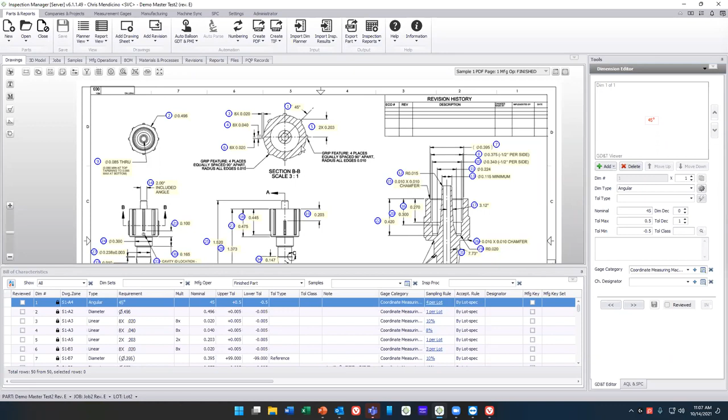We're a full quality management system heavily focused on inspection and quality project management. So what that means is we start all the way from ballooning, like what you can see here. You have a drawing that's interactive, that we can auto balloon in one click up here. So I can just auto balloon drawings and collect all the GD&T requirements.

We can even work with 3D models, you'll see that tab right over here. We're not going to talk about 3D models today, but 3D models with PMI is something we can work with as the foundational input to our quality planning. We'd extract all the requirements from the drawing and populate a bill of characteristics here. So that's the fundamentals of where Inspection Manager started, and what even our most basic customers are utilizing our product for today.

But there's so much more to it, and that's what we want to get into here today, some of the more advanced aspects. So when we're talking about PPAP and quality project planning, a huge part of that has to do with how you set up your inspection plan from an operations perspective.

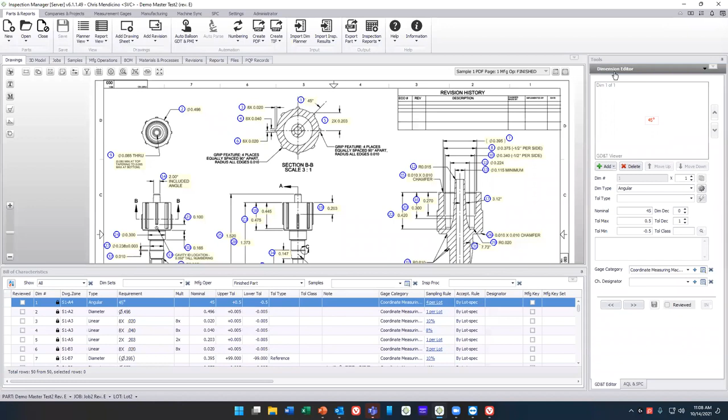One of the most critical aspects of what we do is we give our customers a strategic advantage because we've drastically simplified the process of breaking up inspection plans into operational context. So we'll take a drawing like this with a raw bill of characteristics, just a list of all my inspection requirements per the design spec, and then we break those into operation steps.

Now this is the foundational piece to all the rest of my PPAP processes, right? Because when we start getting into PPAP, we're going to build things like a P-flow, PFMEA, control plan. We'll get into SPC analysis, and you may have critical features at each stage of the process that you want to monitor.

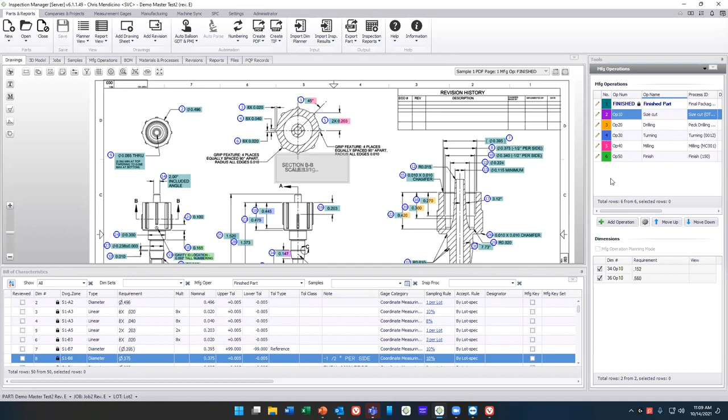So just by selecting a few features like this and clicking add operation, I'm able to build out this set of operations here. When we build operations, this is a little beyond what a lot of other ballooning products even do. This is more akin to how maybe an ERP system would build this, but more in-depth than just building a straight-up routing. What we're doing is actually building a unique inspection plan at this operation stage. We've got size cut, drilling, turning, milling, finish — these aren't intended to be specific or realistic for this part, just for demo purposes to have some example content.

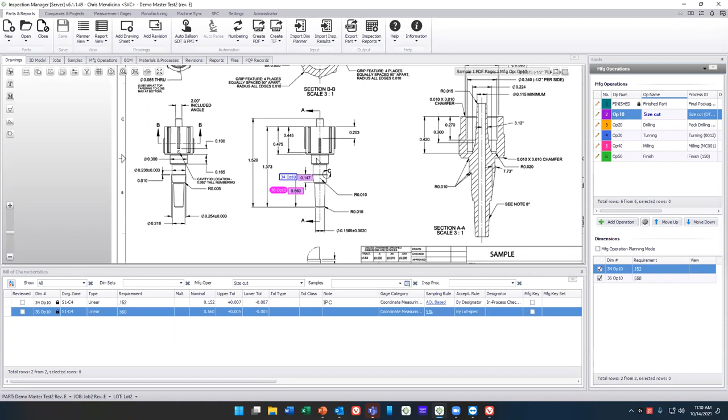So you can see I've got two dimensions to check here. I can go to drilling and take a look at that one. I've got a couple dimensions to check here, and so on.

Now one of the important aspects of this is that I can modify any of the characteristics at this stage, without impacting the dimension at the finished part. I can modify the nominals, the gauge category, the sampling rule, the acceptance criteria designators — I can modify anything about this. You'll even see here, this one, I've got a critical feature and one that's set to in-process check, and we even changed the balloon shape so it's recognizable on the print as something modified in process.

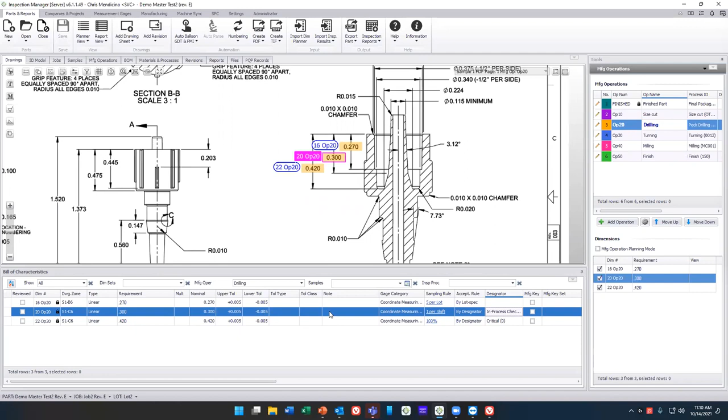So that might have an alternate characteristic. I actually think on this one I modified it here slightly — see the nominal here, the actual requirement and tolerancing are slightly larger than what's on the actual drawing. So this is all to be able to prep what feeds into our P-Flow, FMEA, and control plan, right? We're able to manage our inspection requirements here on this side of the product.

Now here's the fundamental step, because where we're going to go is into what's called production quality planning, our PQP records tab here. So we're currently inside of a part, inside of a job instance of a part. I don't just have part records, I have inspection plans and requirements at a job level, or some of you may call it a work order or production order or something to that effect — terminology aside.

So at the job level, my customer ordered a particular quantity of these parts, and I need to specify the exact inspection requirements in the context of a job. That's the area in the hierarchy we're looking at right now as far as our data set, and we're looking at all these operations here.

One of the big things we wanted to do as a company was start adding automation to the PPAP process. So when we get into the PFlows and FMEAs, most of you are familiar with building these forms and the time it takes to build out all that raw content. To populate those more quickly, if we want to run an FMEA and have it populate a bunch of templated content, we need some context.

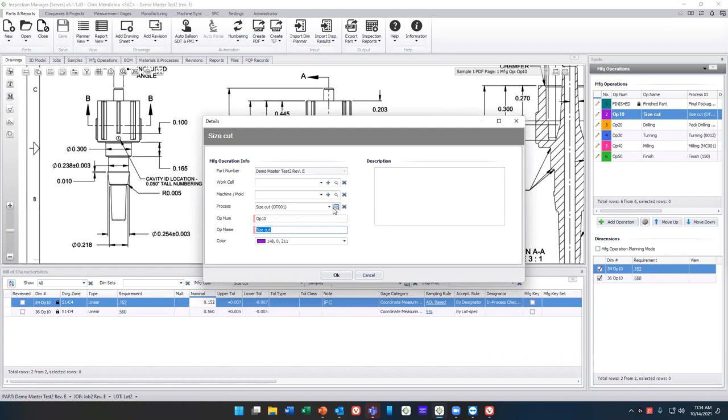Let me show you on the back end where that is. If we come up here to the manufacturing tab - for those of you not familiar with Inspection Manager, some context: the Parts and Reports tab is where we do all our work on part and job records, and everything else to the side is system level asset management, settings and rules, gauge management, things like that. On the manufacturing tab, I can manage my machine assets, work cells, part categories, and process library.

This is where I've got all my processes laid out nicely here. I've just got a few, but you may have a dozen, a hundred, or 500 of these processes depending on the size of your shop. The idea is if I can get my processes defined enough, maybe for some of you just having a process for drilling is enough, where you'd plan for potential risks or failure modes for a drilling operation. But maybe some of you get even more granular, like peck drilling or deep hole drilling.

So these can be as general or detailed as you need. The idea is I can have these processes with unique IDs where I define all my potential failure modes and the content that goes along with them, so now I don't have to retype this stuff all the time. I don't have to work so hard to keep all my different quality personnel spread across different teams and departments on the same page - they're all working off one system, one database, not using their own tribal knowledge and Excel spreadsheets scattered around network share folders. They're able to utilize one centralized library of content.

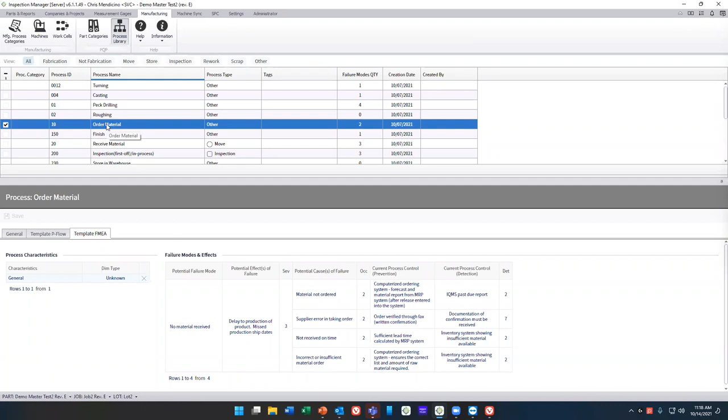repeat operations and processes. Like order material, you probably do that for 90% of your parts. Or you have receiving. Or there's an inspection first off in process. So there's going to be general processes that apply to a huge number of your parts, and it becomes less work over time as you go. All right, so that is the key concept here with the process library that we want to set up.

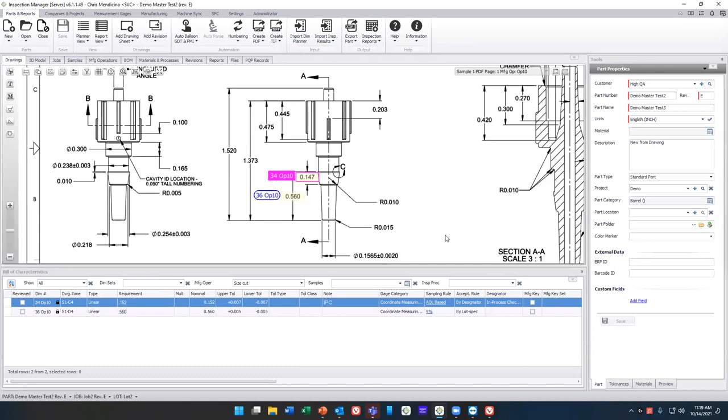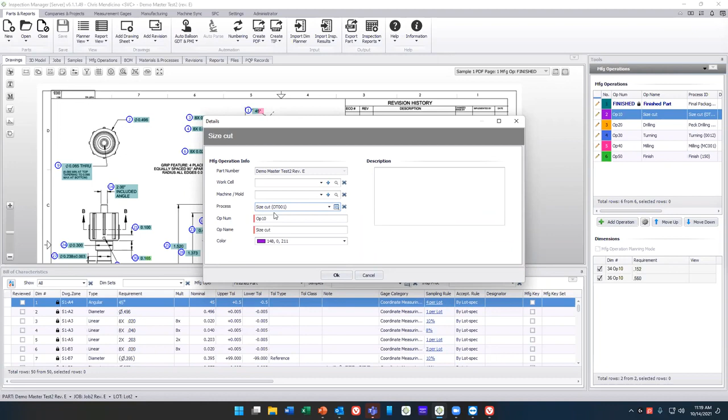So from that, let's go back to our part record here that we are working in. I'm going to come up to my finished part, okay. So from that, we've come in here. Now just as a reminder, now that you've seen the backside of things, let's look at one of these operations and see when I'm linking to a process. I'm pulling from that same list of processes that I end up linking this to. So by linking this, it's going to feed all of my reports that I run, okay.

Just so we have that connection now, we've done it a couple of times. So let's look at the PQP records tab. I've set up my inspection requirements. Now, I could either do this somewhat in parallel or leading up to building the part record out. I don't necessarily have to do all of the ballooning and such before I start building in my PQP records tab here. But a lot of what goes on in PQP records is dependent upon what happens at the drawing level. So there's some interdependency, but you don't have to do it holistically one after the other. We could get started with some of this when we're building out a new project.

So what we're looking at here in this tab, let's focus on two primary columns first. There's a title column here, there's a document instance column. So this is what we call an index. It's effectively just a project checklist of sorts for all of the documents and reports that you need to compile, have approved, and have signed off and completed in order to call this job complete. So we think of these jobs kind of as quality projects, and this is my project checklist.

So this becomes sort of your project management dashboard at the document level. For those familiar with Inspection Manager, you know the samples tab, where you can see all the samples and how far they've moved through inspection. I've got a few down here that have a few remaining features to check.

One of them's got a failure on it, so we color code accordingly. This PQP records tab has all the documentation, and I can see the submission levels for each item, whether I should retain the document or submit it to the customer. I can see the percentage complete, based on workflows, which we'll talk about in a second. This gives me a high level overview of what's going on.

Now, the way these get populated, obviously we're into a part that's already well developed, but they get populated through templates. If I go to change this index, it'll show me my list of templates if I want to swap them out, which I probably don't want to, but we'll show you this here.

I've got a few templates in my system. Let's look at a preview as an example - this is a standard new part PPAP index. These are four out-of-the-box templates that come with the system to get you started, or they can be configured to your business processes, your business logic, and the way you work with your customers.

And that, speaking to the implementation side of things, is something we help you get lined up. We do a lot of consultation and scoping of the overall project to understand whether you can use our out-of-the-box content. Usually, for most of our customers, our out-of-the-box content satisfies about 80 to 90% of what they need, because we have a very robust set of reports and project checklists.

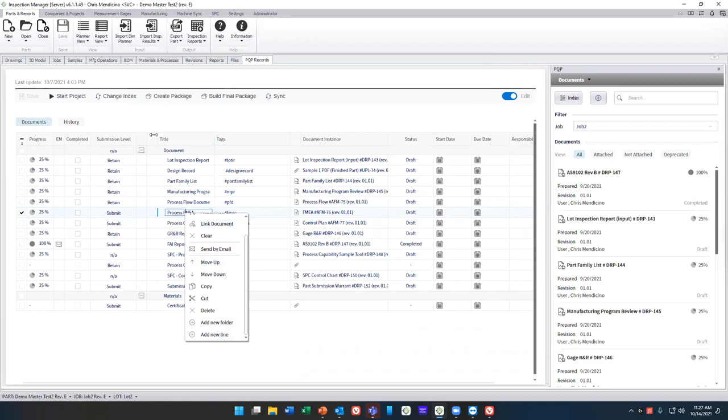Again, these are indexes, these are templates that we're looking at in our system. On each job, you pull one of these in and say, this is what I need, and maybe it covers 95% of what you need. If you need to make edits at the local level, you just come up here, say edit, and I can manage this checklist. I can right click and say move something up and down, copy, cut, delete. I can add new items and kind of organize my project checklist here as needed.

And this is at the job level now. So let's talk about this project checklist. This is the index that we've been going over here. Let's talk about the reports that get run. What do we want to go into first? Well, let's go into the FAI report, right?

So the system automatically attaches the balloon drawing and attaches any material cert requirements or processes, as I mentioned. And then we start running our reports. There's some very cool automation that we can add around that, but at a base level, I run my reports for each line item.

So I'm going to look at this FAI report that I have here. I'm just going to click that to open it, and you can see the setup that we have. Now, for those of you familiar with Inspection Manager, and maybe you've been using it for a few years, you're familiar with our existing reporting engine where we were exporting just to Excel and you could manage your reports from there. So this is a completely reimagined reporting engine that was built from the ground up.

I know there's a lot of companies out there that build reporting into their product using some third-party reporting engine like Crystal Reports or something like that. We didn't do that. We built ours from the ground up because we wanted full control over the entire logic of the reports, so we can go very, very deep with how we automate them and how we manage them through the system.

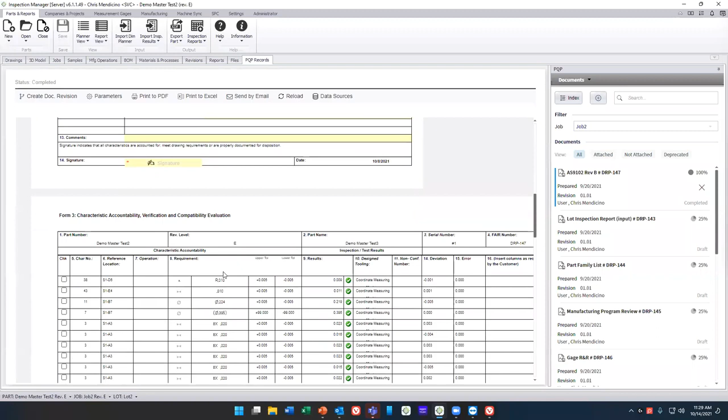And we've done some, what I think is some very impressive work. We have a very talented development team here. So what you're seeing right here is a kind of dynamic form inside of the product. We ran this FAI report, and it's something interactive now, not just a static Excel or PDF. It's something that I can engage with in the product, almost like a mini application inside of Inspection Manager.

And this form has its own data set, its own sort of revision history. So I can create revisions of this document, I can add attachments to it. It's got a workflow associated with it, and all the history of who's engaged with this form and when. So if I look at history here, I can see anytime the workflow has been modified. I can see, if I view minor records, anytime anybody's opened this even to review it, or anytime someone sent it by email, maybe they submitted it to a customer. So I can see all of that content in here, that whole history of this form.

So when we say going beyond Excel or going beyond Word and such, we're not just creating web application forms or something like that. We're actually creating a whole tool set surrounding these forms to help you manage them better, not just have them in a nicer interface, but help you know when the due dates are, who's assigned to it, who has access to edit it and engage with the content, and which projects it's part of. So that's adding now to this index level to be able to see the status of each document in here. I mean, how many times has this happened to you guys where a project or a job is late and you're trying to figure out, okay, well, what did we need for paperwork?

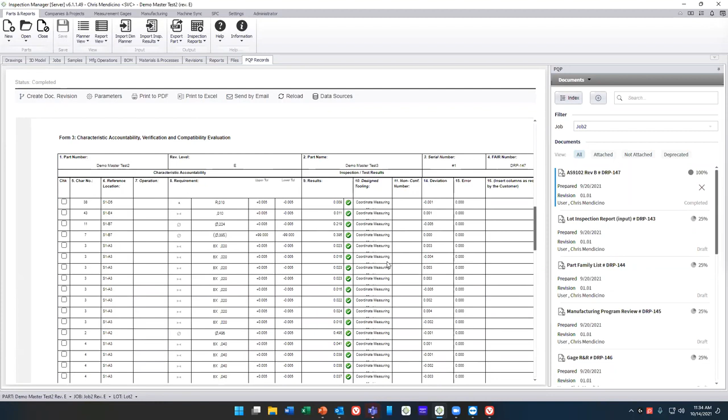Okay, so probably enough said on that. Let's keep going and look at a few more. So that was just an FAI report, just because I wanted you to understand how versatile just the standard reports are. But let's look at some of these other ones, because we were talking about PPAP, right?

So let's look at a process flow document, our P-flow. So I'll open this up. Again, this is an application form, okay? So this is my full routing that I can build in. This is a standard template that comes with the product, when you buy the PQP portion of it.

And so I'm able to sync all of my operation steps from the drawing level. Okay, so when we were back on the drawing, we did our ballooning, we grouped everything into operations like we talked about in the beginning of the session here. When I run my P-flow, all of those operations get pulled in. But that's really only what we had there was size cut, peck drilling, turning, milling, finish.

We didn't have order and receive material. We didn't have inspection and final packaging. Okay, so how did those get into our P-flow? Well, we use this button up here, add process. So when you run the P-flow, it syncs from the drawing first, and then you add the additional processes that are more peripheral to the overall routing.

They're not necessarily manufacturing oriented, or they don't have inspection steps in them necessarily, but they do need to be factored in when you're looking at your overall P-flow, your FMEA, and your control plan, okay? So we build that out here.

So that's all defined at the process library level. I can also look at my templated FMEA content, which we'll look at in a second in the report. Okay, so all that stuff is templated up at the system level. And we'll look back to our PQP records here. Okay, and we're back into a specific P-flow now for this job that we've been looking at.

So all this content gets built in. Anytime that I make changes to either the drawing level, or maybe I make changes at the process library level, I can sync those changes into my local form if it's something that's active and still in process that needs to be updated. Now, again, this whole document has this whole set of tools up here.

So I can have revisions of this. It'll go through workflow states, right? So I have a workflow attached to this. Very, very simple workflow, just to get the point across here. These can be more sophisticated with multiple approval levels, signatures, and all kinds of stuff. But in this one, I'm just going from draft to complete.

So it shows me what my current status is for this form, and who has permissions for the different roles. So in a draft state, it's the responsibility of the QC inspector. So who is the QC inspector?

So for some of you that are maybe in a smaller shop where you've just got a quality department, you may have this set up so it defaults to the same person all the time as QC inspector. But some of you might have larger companies where you've got multiple different departments for different value streams throughout your organization.

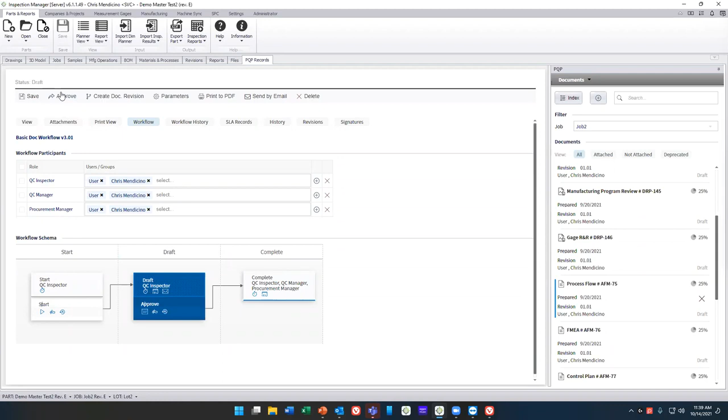Okay, so then the person responsible at this stage has an action item. In this case, it's approve, right? So that's why I see this button up here at the top of the report. Once I'm done setting it up, I can approve it, and then it's set up as complete in the system.

Again, those can have multiple stages to them. There might be multiple rounds of approval. Maybe I have to escalate it to my manager, and then he sends it up to his manager, and a couple people have to sign off on it. And we support all the electronic signatures. You can even go and view signatures that have been accumulated against any document. And so all that can get accounted for. Don't worry about it, we're just keeping things simple for the demo stage today.

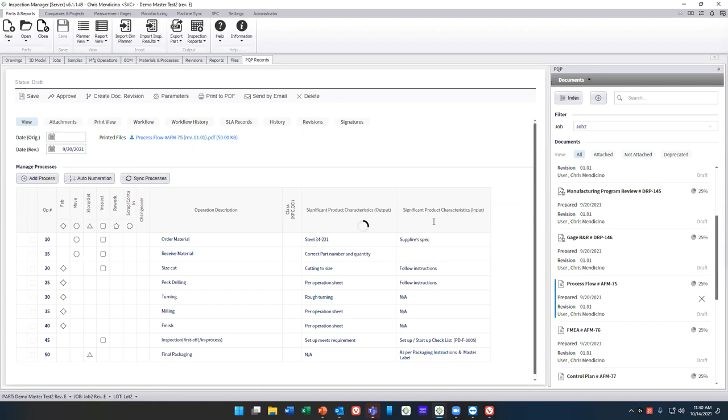So this is our P-flow. FMEA would be next, right? So we run an FMEA here. Now the FMEA triggers off of the P-flow. So I've got my operations that pulled in, again, the order material, receive material, size cut, etc.

But this time it pulled in all of that templated content that we were talking about at the system process library. So the potential effects of failure mode, the severity, potential cause, and so on. All this content gets pulled in as soon as I run this FMEA report. I didn't touch this, I didn't make any changes to it, I just ran an FMEA. And because we know the operations or processes in the P-flow, then we know the template content that needs to get pulled in.

Now, of course, you may need to make changes at the local level, like on a per-job basis. Maybe you need to make some adjustments. That's fine. You can engage with the content, click, type into it, adjust the severity, occurrence, and detection levels. RPN is calculated, right? So all of that's able to be modified.

You can even right-click and say, up in here, we can add failure modes to this if needed, just for this local level. Or maybe we learned something, maybe there's a new failure mode for this operation. And maybe we say, well, this actually applies up at the top level to any time that we order material. We always have this potential failure mode.

So I can right-click in here and update the template at the system level, so that any future job that pulls FMEA content for an order-material operation pulls the latest and greatest content. I'm able to leverage my learning forward and continuously improve my processes in a much more simplistic way, because all that learning is aggregated into the centralized system. Lots of good stuff.

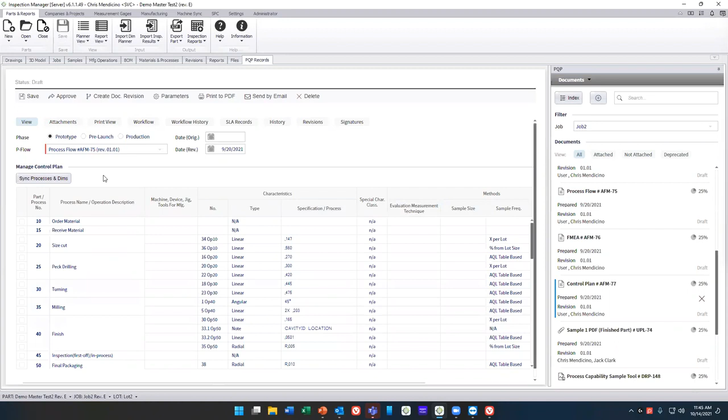All right, so last thing I want to hit on real briefly, just to close the loop here, because we didn't really have a ton of time today to get into things like SPC control charts and so on. I'll hint at one here so you can get a rough idea. Hold on, I got a better one here, I think. No, I don't think I have a good example of it on this particular job, but that's okay.

But yeah, Gage R&R, SPC, and so on, we can handle all of those as well, because any of you familiar with our product are familiar with the data collection tools where we're collecting inspection data from CMM equipment, any automated inspection equipment, and from manual inspections through our apps. All that gets aggregated into the SPC reports and lot inspection reports and so on. One thing I want to hit on here before we wrap up the process is all this content is able to be managed.

At the end of the day, I have to get it to my customer, or you have to get it to your customer. So we've made that simpler as well. Obviously it doesn't do you a whole lot of good if you can manage all the content in the world but can't get it out of the system. So we made it very simple to do that.

If I look at my FAI report here, I can just directly send this via email to my customer. If I click on this, it brings up a nice little form to send this via email. Right now it's compiling this into a PDF, so it'll pause for a second. But I can say exactly who I'm sending this to, add any text to the message, upload additional attachments if needed, and send that off.

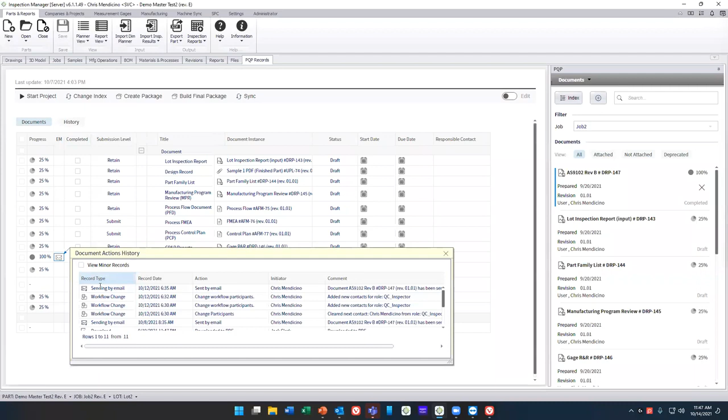Now I've already done that previously, so I'll show you something here. There's an email history, because this icon shows up in my index. Anytime any document has been emailed or sent out of the system, there's traceability for that. I can click on this and see, in my action history, this was sent by email on this date and time by this user, and sent to this email address. So I have full traceability of all that information, so users aren't just emailing stuff and you're saying, did I send that to so-and-so? Did I not? Who did this or that? You have full visibility of everything going on here.

And then at the end of the process, we want to build this into a final package. So all of these documents get rolled up into one aggregate PDF that you can then email off to your customer at the end for the final submission package.

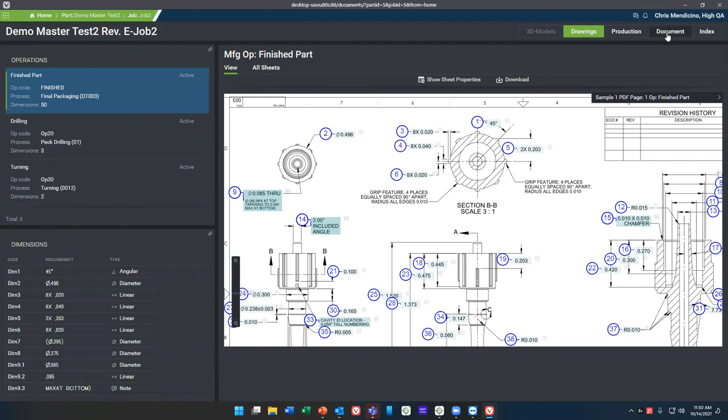Okay, so a lot of things to cover here. Like I said, that was kind of a quick overview, but hopefully that gives you some ideas and context for this.

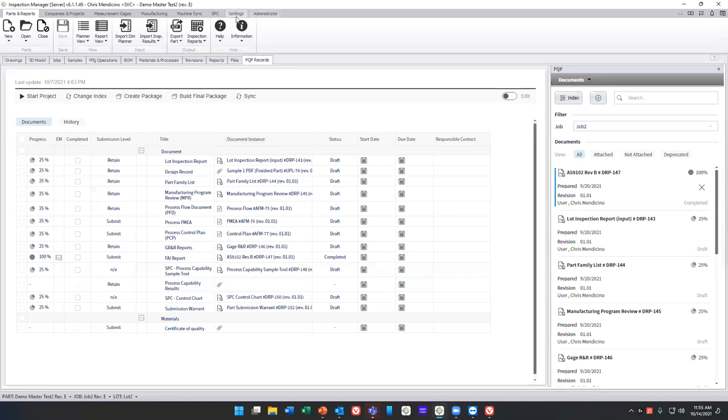Yes, we have a default library of template content, what we call components here. I'll show that in the product - the indexes I was talking about, the reports, the workflows. Up here, if we go to settings and component templates, there's an out-of-the-box library that comes with the product that you're able to use and hit the ground running day one when you first open the system up.

And then we can build and add to that library of content from there. So you'll end up with this library of system components where you have your application forms, your FMEA, process flow, control plan - this is for tracking material certs as well. The indexes that we provide, those are the 4 indexes we talked about earlier.

Okay, so just some standard checklists to start with to get a feel for things. There's a whole variety of what we call dynamic reports - those interactive style reports we were looking at. So a couple different versions of first articles, some lot inspection reports, a few different types there, a few different kinds of SPC reports, Gage RR, part submission warrant, so on and so forth.

And then we have out of the box workflows as well. This is what would typically come with the system: a basic document workflow with or without a signature, and then one that maybe has an approval step. So if we look at this here, this one just goes from draft, has a review stage for approve or reject, and then it'll be completed if it gets approved, right?

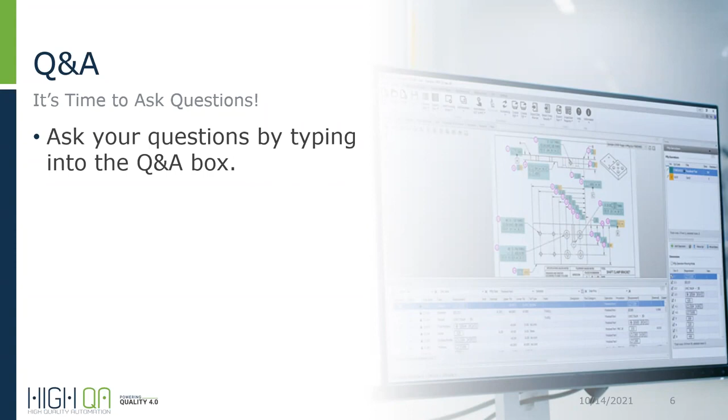Perfect. Anything else you would like to add, Sam? That actually looks like it's it for questions. We are at the top of the hour as well. So Chris, if you want to go ahead and forward the slides, and Sam, you're welcome to share any other thoughts - just maybe say something also about the integrated solution.

You need to have Inspection Manager in order to have the PQP, and on top of all that Chris mentioned, the nice thing is when we talk about a database driven solution, it integrates all those components from A to Z - there will be no redundant data entry. So whatever you do downstream - preparation, ballooning, inspection planning, process inspection, tool and gauge assignment, SPC - there is nothing that you need to do later on, definitely not on the PQP, because all the data, all the requirements will be automatically propagated there. And then when you have data collection, whatever needs to be there will get there through the HighQA database. So there will be no redundant data entry, no copy paste, no manual inspection - actually completely paperless.

Okay. Excellent. That's perfect. We like to hear that.